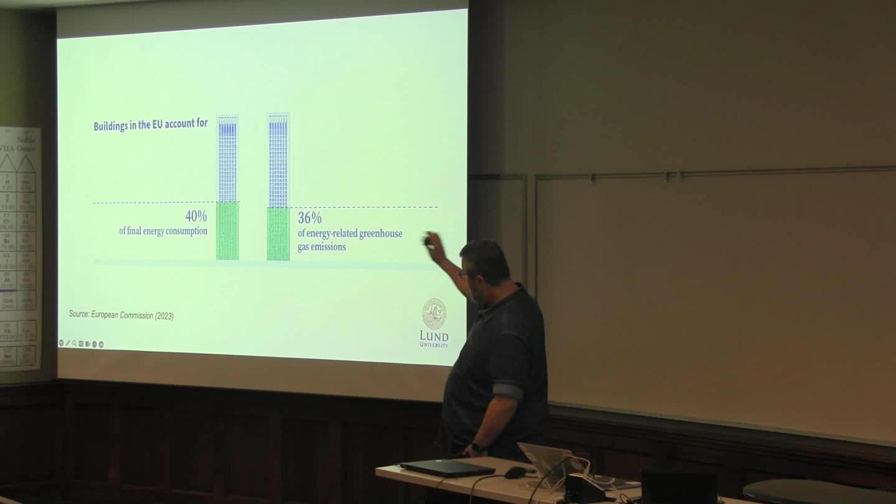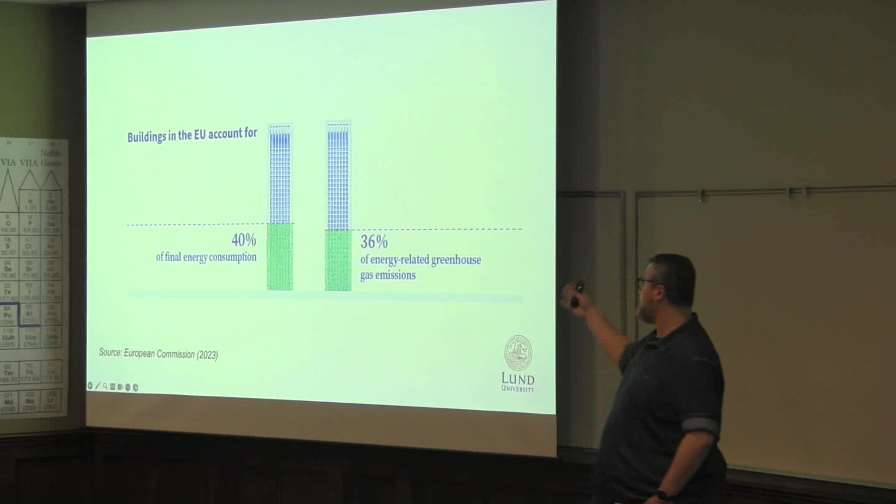That is a challenge with many parameters, can be different lectures. When we go to the buildings, the mix of buildings in the European Union is quite diverse. But let's start with the goals. They account for 40% of final energy consumption, especially for heating. Still, many European buildings use electricity as a heating measure, and they are responsible for 36% of energy-related greenhouse gas emissions.

There is a huge potential for cuts, and that's exactly what we are trying to do. Almost 75% of the existing buildings are inefficient, and they will require energy renovation on a large scale. Just think of different countries or cities you have in mind - quite a huge building stock that is before the Second World War. If less energy is used and more green energy is included in the mix, then we hope for fewer emissions.

It came with different kinds of policy and different kinds of strategies for both residential and non-residential buildings. The member states had to set minimum energy performance standards. By 2030 at first, lower than 16% of the worst performing buildings. You will see later on that when we talk about the old building stock, this is a very puzzling case to achieve, at least in the majority of countries.

And by 2033, lower than 26% of the worst performing buildings. In some countries, it has been included in the legislation to compare against the worst performing buildings as the building stock is, but in other countries, this comparison is against a newly built standard, and that creates a challenge, because a building from the 20s, it's pretty hard to achieve that level of a newly built.

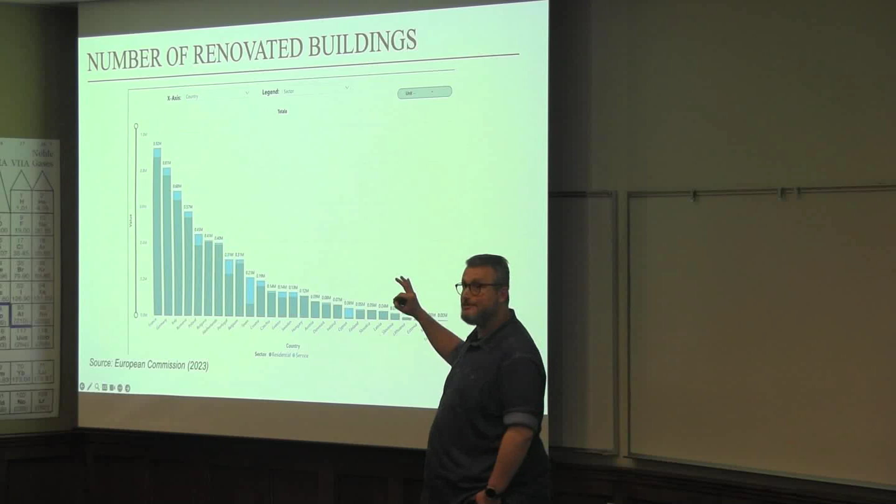This is the fun fact. When we see the number of renovated buildings in Europe, we see quite a high number in some countries. This is a very tricky number though, because when we talk about renovation in general, even if you paint the outer walls of your house, it is considered a renovation. Even if you change glass on your windows, it is considered a renovation.

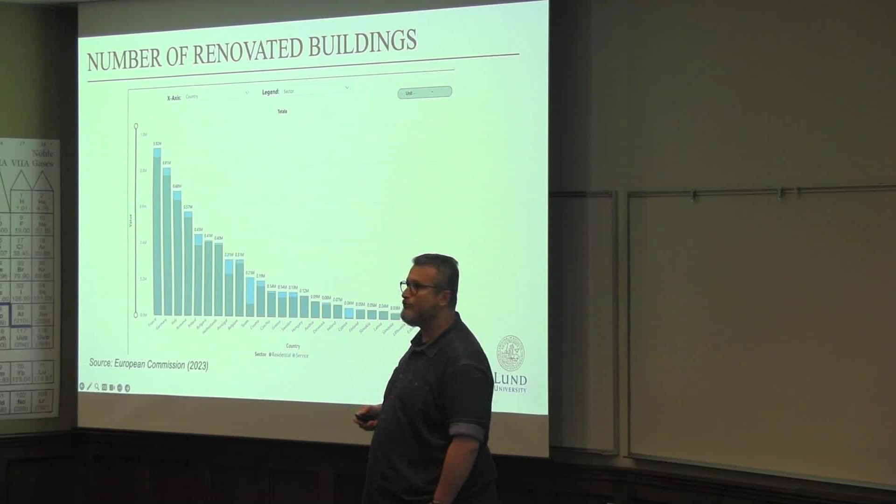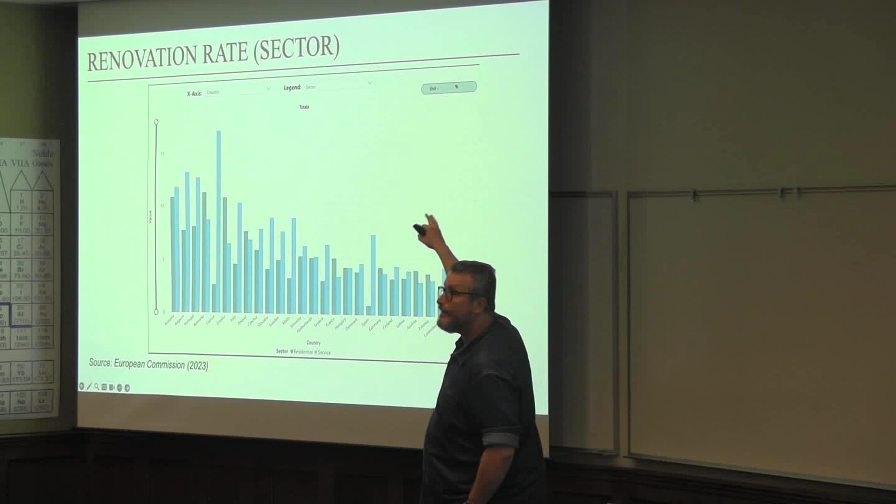When we are going to go to the energy renovation of them, the renovation rate per sector, you will see that it's quite high in terms of percentage. But when we are going to the energy renovation that actually is going to produce the results we want, we go in most of the countries below 0.6%.

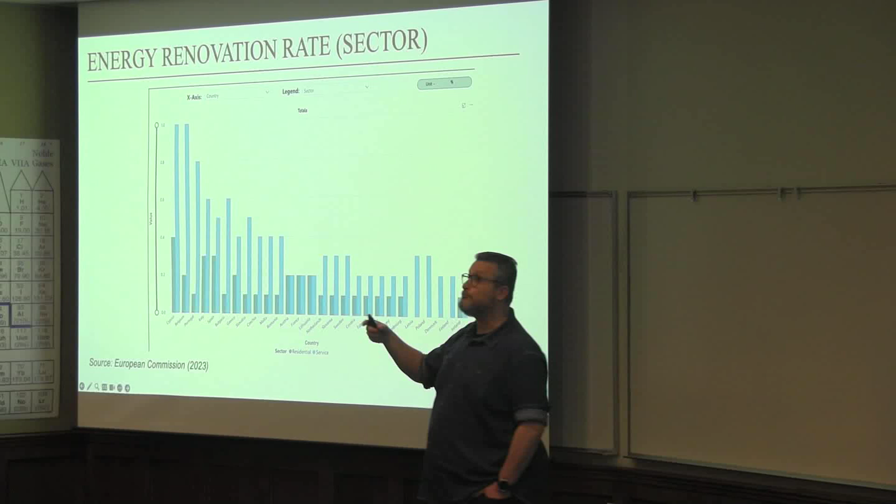The optimal goal, in order to be as close as we can to the goals that I described before, is to have a minimum of 3% of the buildings renovated in every country every year. So from 0.6 to 3%, it's quite a distance.

But the European Union, since they saw a big opportunity, a big market opportunity for that, they came quite strong with the one-stop shop business model. It is a model that is not innovative at all. It is quite an old business model existing in the market, but we have tried to apply it in the building sector.

We want a combination of materials and products in different trades, somehow to bring all the different people involved in renovation in one place, focus on this renovation, and deal with the complex characteristics that the renovation of a building has.

It's still, per country, very difficult to evaluate how these combinations of solutions will work, but at least we have a clear view of what kind of solutions need to be applied per building. We save the customer from the huge investment of finding all those different professionals and from the huge transaction cost of trying to bring all those professionals together.

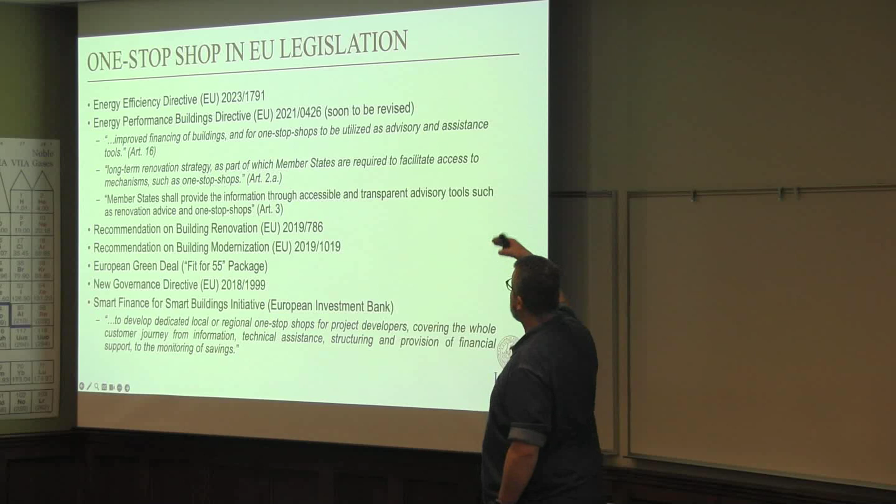The European Union has propagated this in any possible way one can imagine. It is still in the new Energy Efficiency Directive, which clearly says about one-stop shop. We have the Energy Performance of Buildings Directive that says that in order to achieve the goals, especially in the building sector, we need to improve financing of buildings and develop one-stop shop and utilize one-stop shop as advisory and assistance tools.

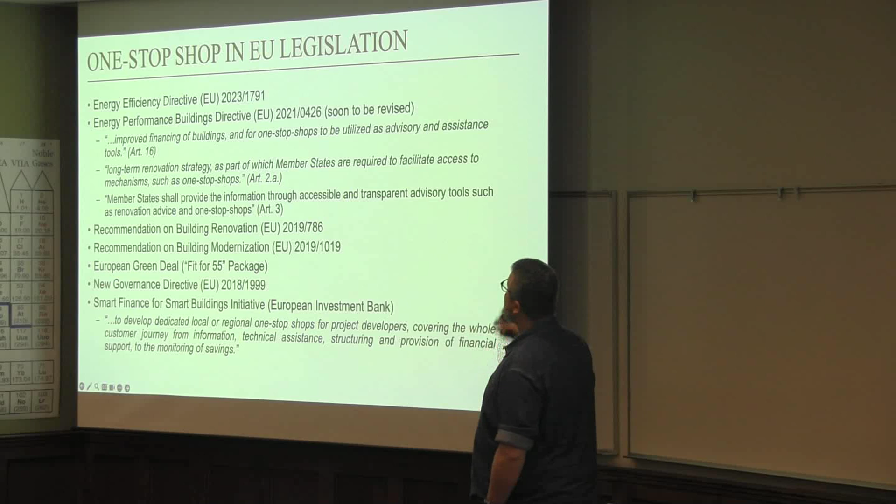Countries have to develop long-term renovation strategies, part of which is to facilitate access to mechanisms such as one-stop shops. They shall provide to their people and their communities information through accessible and transparent advisory tools such as renovation advice and one-stop shop. The renovation advice has been applied in municipalities.

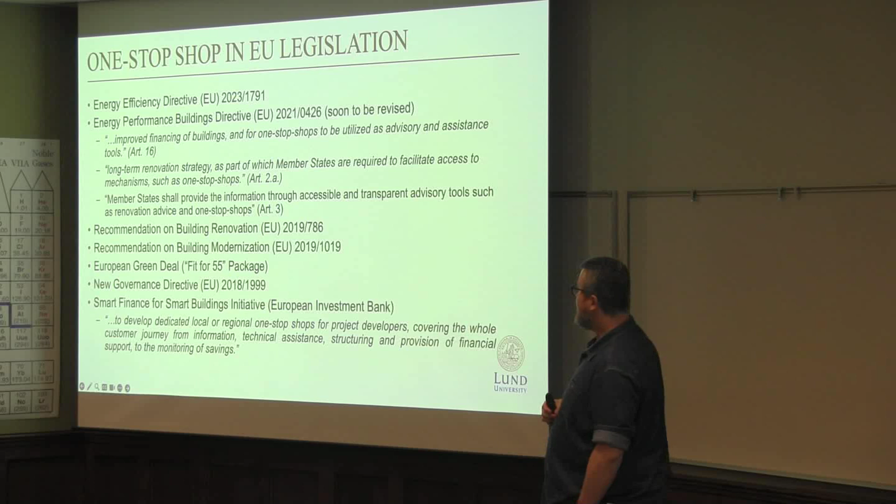One-stop shops are again in the market. The term one-stop shop exists in the recommendation on building renovation. It exists in the recommendation on building modernization. It has a whole paragraph dedicated to itself in the Fit for 55 package that is about circularity and efficiency of materials in the European Union. It is clearly stated in the new governance directive, and of course, it is included in the Smart Finance for Smart Buildings initiative that comes from the European Investment Bank.

But what is one-stop shop in actual renovation? Practically, it is based on the logic that the homeowner will have one contract for the whole renovation and one contact point. They do not have to deal with different professionals themselves, but they have a dedicated person working for them on that.

And we try to create a model that provides all renovation-related services in one place. The majority you will see, because there are different types, those that go throughout the whole renovation, they offer pre-renovation audit, tailor-made proposals of measures for each building, long-term renovation planning, and in some cases, even a financing plan.

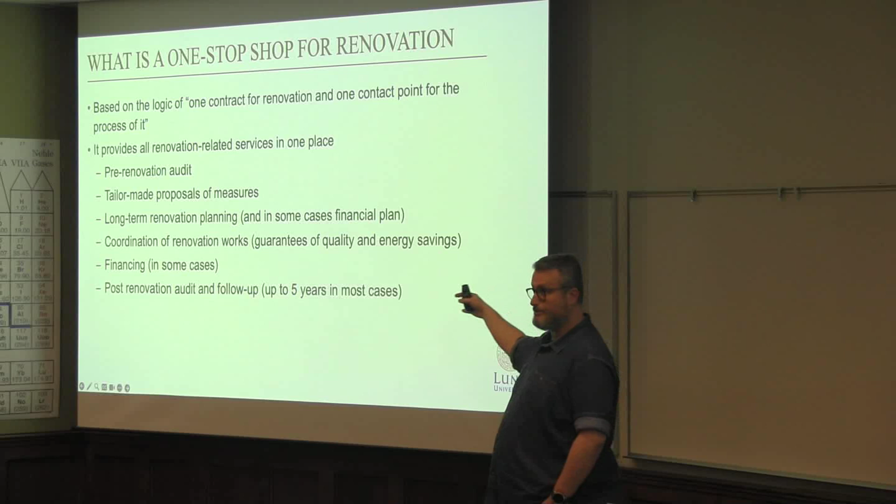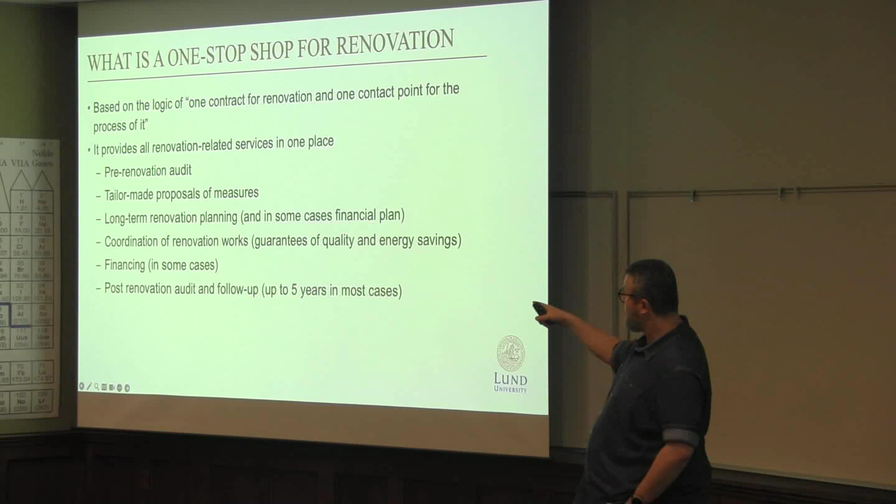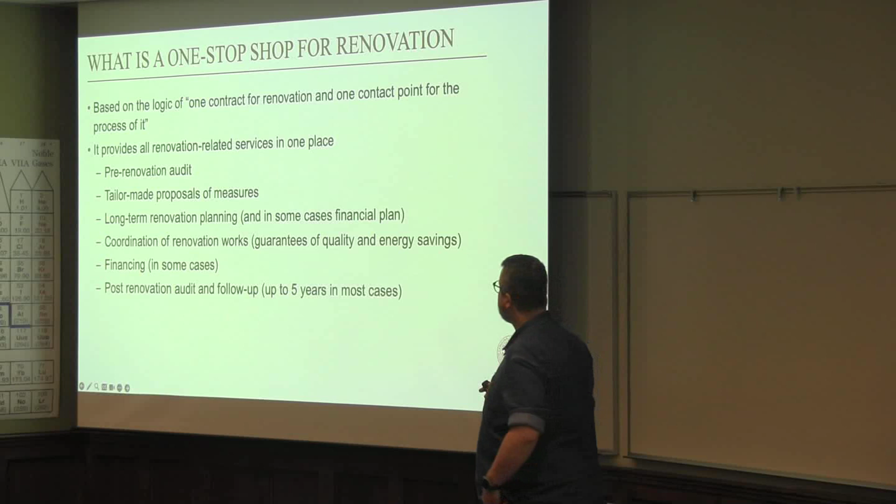Coordination of renovation work and guarantees of quality and energy savings. We have even developed a contractual agreement that guarantees this. As I said, financing in some cases comes in different ways. We have tried many different financing models. And of course, post-renovation audit and follow-up up to 5 years in most of the cases. So we can guarantee that at least in 1/5 of the life cycle of most materials, we have performed a good work. It is a polymorphic model.

It comes in many different variations. Either sometimes the one-stop shop will do the marketing to the homeowner or the professionals, or the one-stop shop will come and streamline the whole process, or it will be a digital entity that streamlines the renovation process, or it will deal with all the difficult work, including getting permission from the municipality, communicating with artisans, securing financing, performing even the renovation themselves, or it will be the central point for all the different actors involved, or even doing what it's quite known in the US, the PACE programs.

We have tried it. In some communities it was successful. In the vast majority of Europe, it's still questionable if it can work.

But all of these different constellations of the one-stop shop model are separated into three very distinct categories. We have the facilitation one-stop shops that practically get all the info for the homeowner and come with a set of solutions and proposals - it's not committing for the homeowner to follow those proposals. We have the coordination one-stop shops that practically run the whole process in the shadows without necessarily delivering the work themselves. And we have the all-inclusive one-stop shops that take the homeowner from the very beginning up to the end of the renovation.

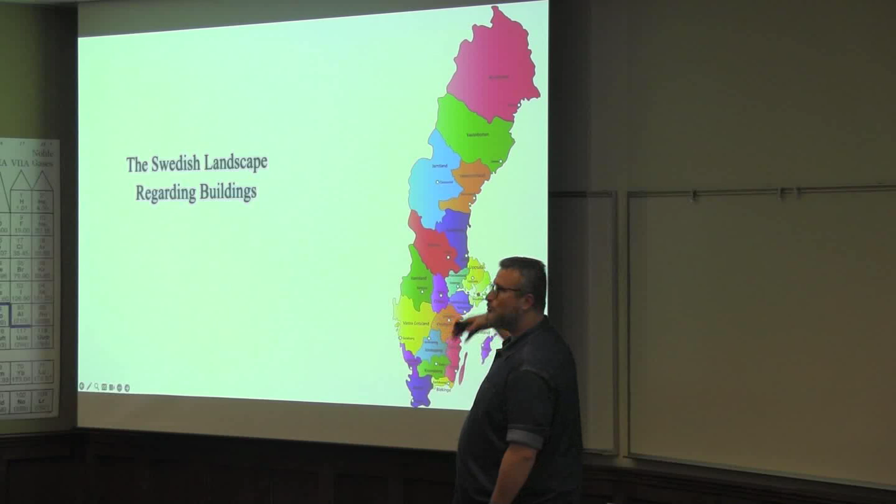If we go to Sweden, Sweden is a bit of a difficult country because we have 4 very different climate zones, so houses come with very different needs. But again, we have a vast majority of residential building stock, nothing crazy there. We have a very good balance between single family and multi-family houses - about 45% single family houses and 55% multi-family houses. What is fun is that the single family houses are occupied by a larger population than the multi-family houses. We have many multi-family residential units that are occupied by just one person.

In terms of occupancy, again, primary residence is the king. Secondary residence isn't that extended, because the landscape helps - some primary residences can work as secondary residences as well. And we have quite a significant number of vacant houses that, again, we have tried programs of local development on how we're going to make better use of them.

The proposal that came lately from us is to renovate some of those abandoned houses - mostly they are old houses - to a living standard, then sell them at a lower price to low-income families or people that want to start a business in the areas where those exist, and then they are responsible for the further renovation of it.

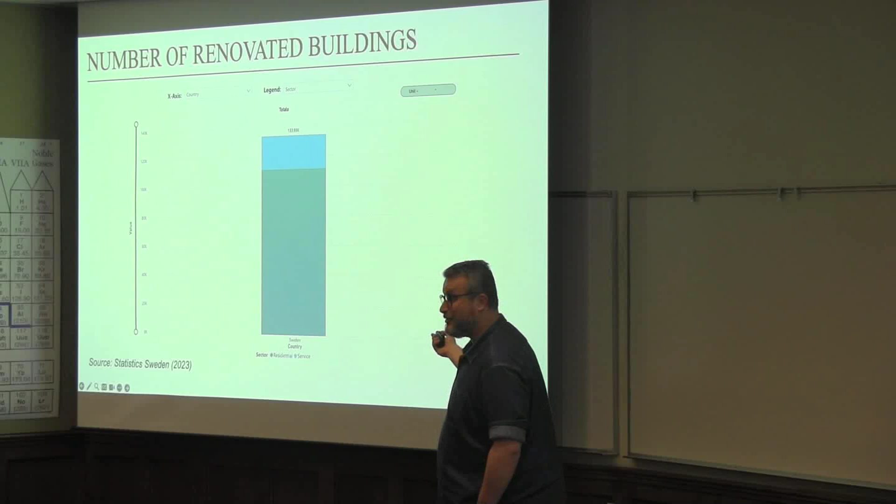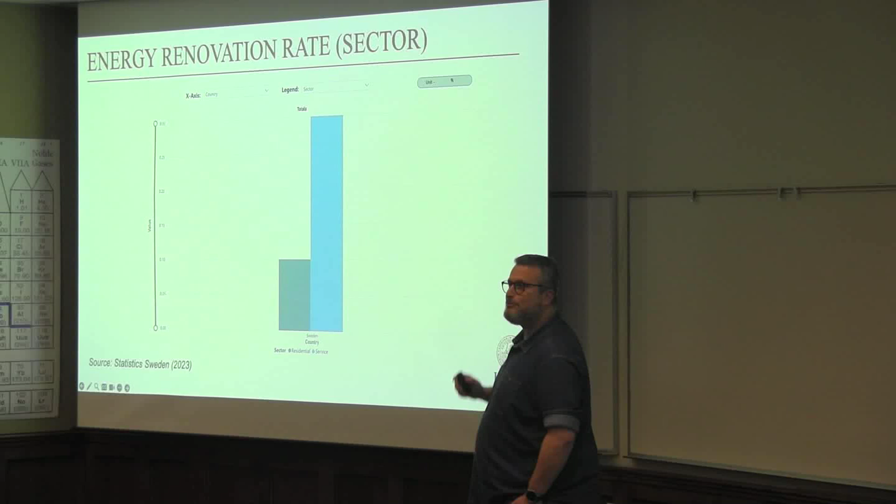When it comes to the number of renovated buildings, quite many are renovated. And when it comes to the rate of renovations, it's pretty nice - again, general renovation, as we said from the beginning. But when we go to energy, Sweden is at 0.3. And being a country with quite an old building stock, this 0.3 is a bit painful. But you will realize why it is painful later on.

The idea for renovations became more evident in the last year as the number of newly built decreases. The big companies in the country have operations to be occupied with, but the small and medium-sized companies that operate in the building sector, there is plenty of business still not used. We calculated that if we renovate 2% of Sweden's residential buildings to the minimum possible renovation, let's say 15% of the building, we talk about a market of around $1 billion per year. It's a huge market, maybe not for the big players, but the small and medium-sized companies, it's a big market.

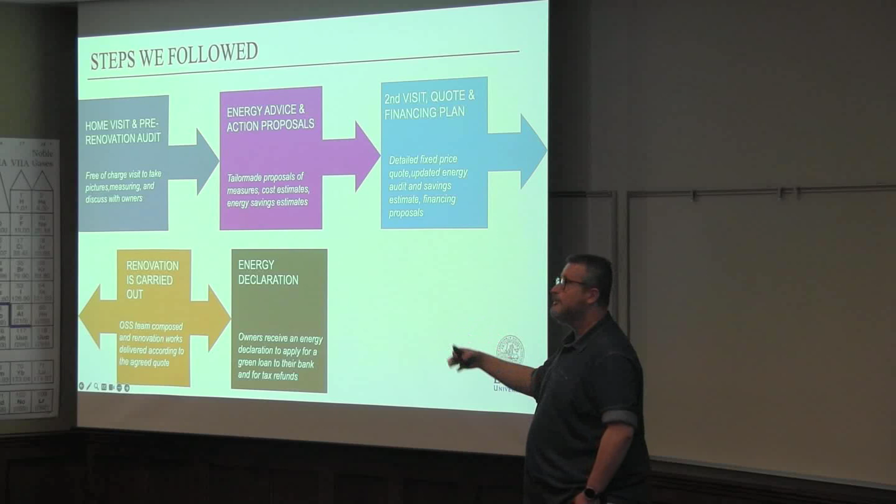We took some more detailed measurements, since they agreed, and we came with a pretty clear quote and financing plan. Hopefully, they have agreed to do the work, so we have carried out the whole renovation, and we gave them the energy declaration in the end to apply for a green loan with the bank.

Part of the renovation, we have secured financing for them, but the other part was through a green loan from the bank.

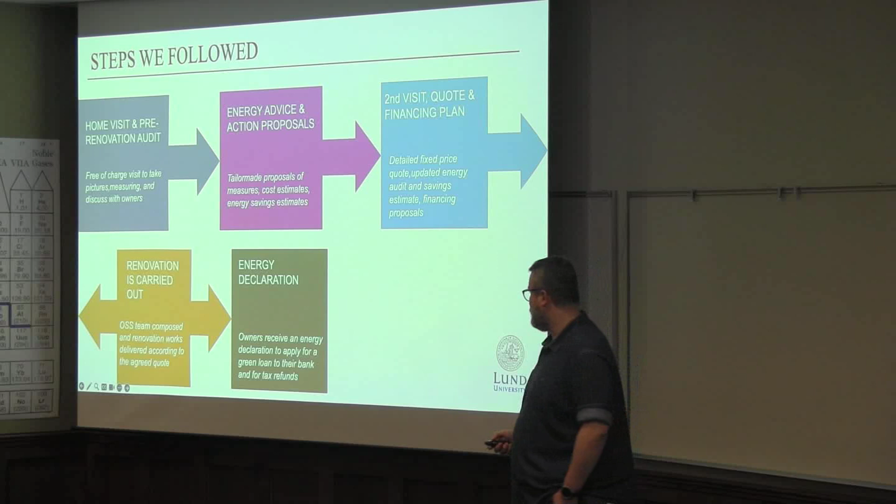Practically, since we are not allowed to share actual photos of the buildings, it is considered information that we cannot share. A bit schematic of what we have done.

We have changed doors and windows, but with windows we had the limitation due to the fact that it was a historical building, so we could not change the glaze of the windows. We just took out the windows, insulated the frame, and put the windows back. The same with the doors.

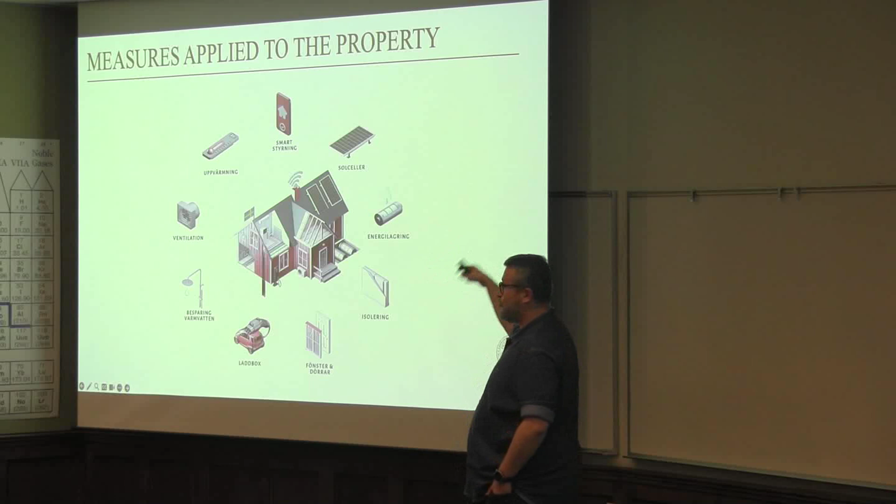We have put some extra insulation. We have applied solar panels. We have helped them with smart solutions for their house.

Ventilation system, which was important and was the trickiest job that we could do. Also, we have created a system to save the warm water and use it for other purposes in the house.

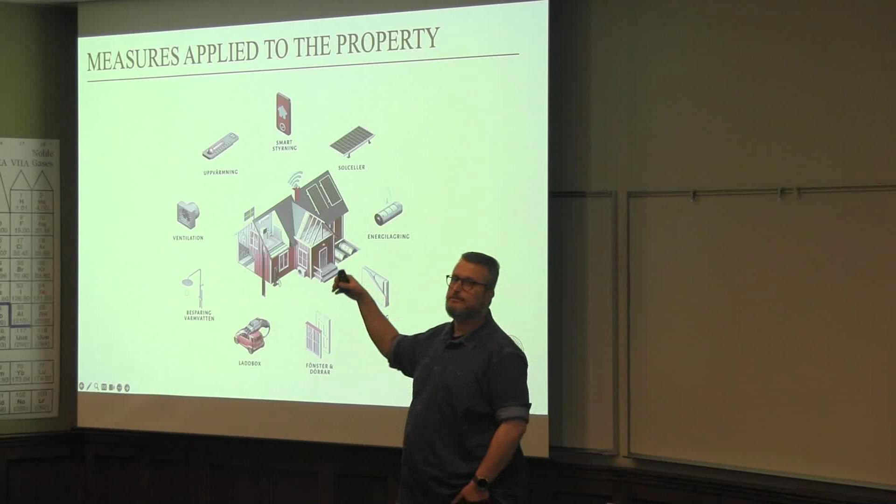And we have changed the heating system from oil and pellet into a ground source heat pump. We could do it; we didn't need to dig that deep for that.

The one-stop shop team was consisted of one energy advisor, 2 electricians, 1 installer for the solar panel system, 1 expert in ventilation and heating systems, 1 plumber, 1 tile setter, 2 painters, 2 carpenters, and an architectural historian that came from the municipality to make sure that we followed the whole process. It wasn't planned at the beginning, but since the building was characterized as historical, we had to include that person as well.

What have we achieved? From 235%, we got to 110% of the requirement for new buildings. So practically from energy class G to energy class D. For a building of this age, it was a huge change. We couldn't believe it even ourselves.

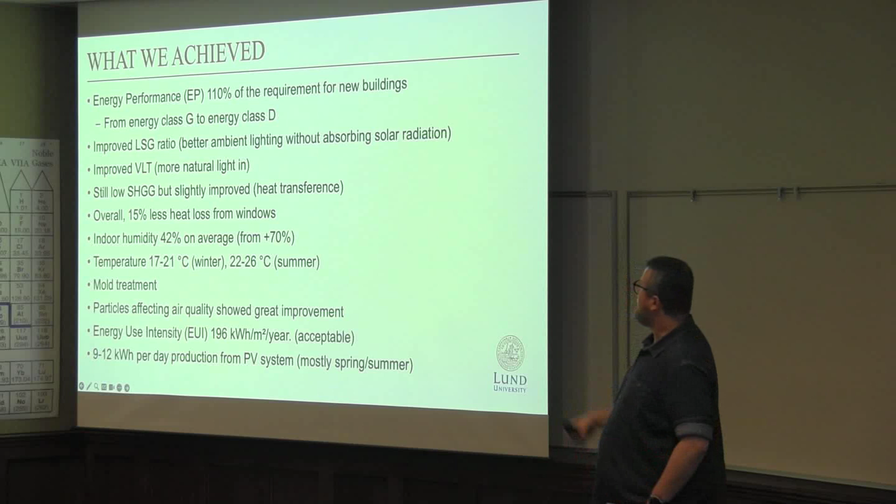We have improved the LSG ratio. We have better ambient lighting without absorbing solar radiation. We have played a bit with the windows, to be honest, and with the actual lighting that we had inside the house. We have allowed more natural light to get in, and that helped us a lot with the heat transference. Still low, but we have to think that we couldn't make change on windows. We couldn't put energy efficient windows, so we had to deal with what we had. But with the insulation we had overall

15% less heat loss from them. The indoor humidity was on a level of 42%, which is pretty cool compared to 70%, plus 70% that it was before. We have managed to have a pretty balanced temperature between 17 and 21 degrees in winter, which is accepted in Swedish building codes, and 22 to 26 degrees in summer.

We have treated the mold. We had to be very careful because we had to keep the floor as it was. So we had to support it at the same time, treat the mold in it.

Particles affecting air quality showed great improvement with the change of the ventilation system. The energy use intensity was acceptable compared to the previous, and it's within the limits of a building of its age and category. We also had quite good production from the PV system, mostly during spring and summer, 9 to 12 kilowatt hours, more than the needs of the actual building. They could sell about 2 kilowatts even to the grid, which was pretty good.

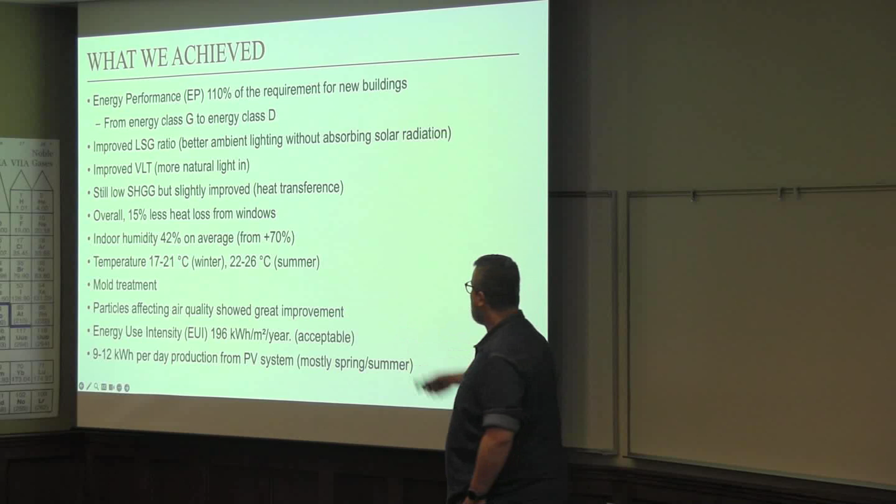The reality of numbers: they bought that property for $48,000. Overall, the cost of renovation was $160,000. The valuation they got right after the renovation is $120,000 from 48. So, by my standards, it was a success with the house we had to deal with. Some others considered it a failure because we haven't managed to get a valuation price that could repay directly back. But this difference in overall price, within 10-15 years, will be fully paid back. Maybe create some profit.

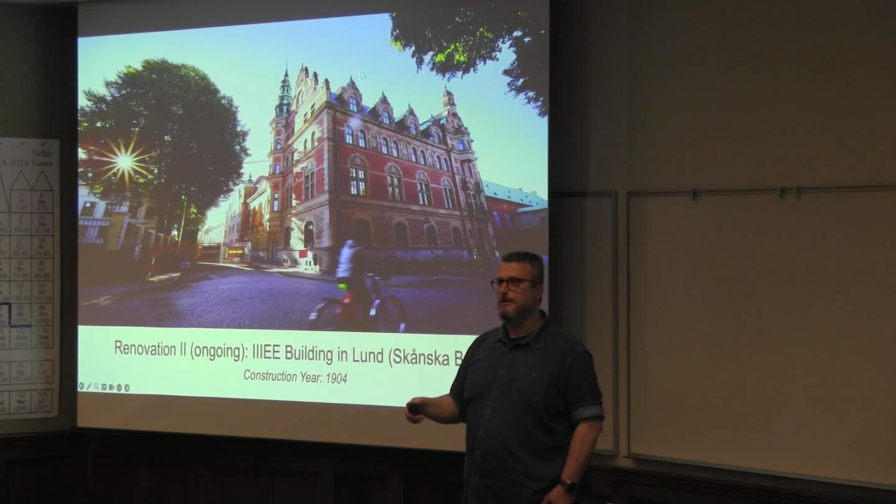Then we're going to the second ongoing renovation, which is actually the building I'm working at. Many fun facts with that building. It is built in 1904, but it is placed in the center of the medieval quarter of the city. In this medieval quarter, we have buildings that are built from 840 up to the late 18th century. And you will see how it affects later on.

First, since we saw that we have too many problems to deal with, we went with historical research and documentation. What was before that building? What happened when that building was built? Are there any archives to see what elements have they kept? What has changed? Then we did a site assessment, obviously. We are there all day, so we did it.

Then we have to go back to see what kind of regulation we have to deal with and what kind of approvals we can get. Because this building is not only historical, it is also a heritage building because of the fact that it is in the medieval quarter of the city.

Then we had to find information about the architectural design and planning since way back in time. We had to engage too many stakeholders, and they keep on coming. And then we had too many problems with material and craftsmanship assessment. Why? You will see why.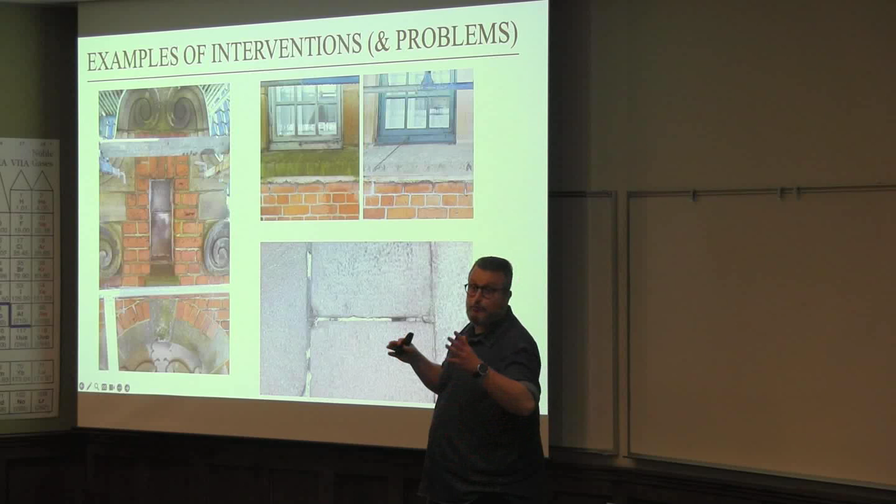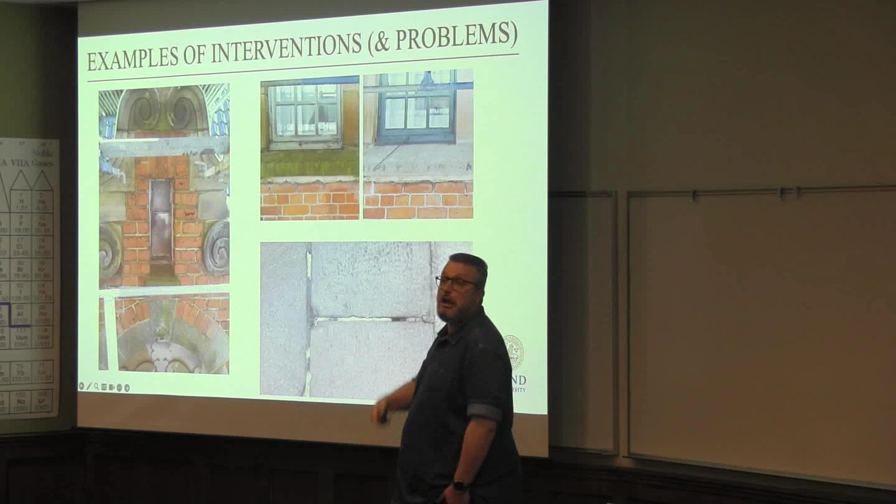Some of the problems - obviously we had lots of mold around. For treating that mold, believe it or not, we had even 2 conservationists and 1 historian working on that, because we have to be very careful with what kind of chemicals we're going to use - they could destroy the original material. The end result, the coloring of the material has to be the same as it appears in the archives. We have to be very careful about that. The filling that we put between different elements has to be the exact same recipe as was used back in time. So you have to be very careful how to do it, and employ someone very specialized on that.

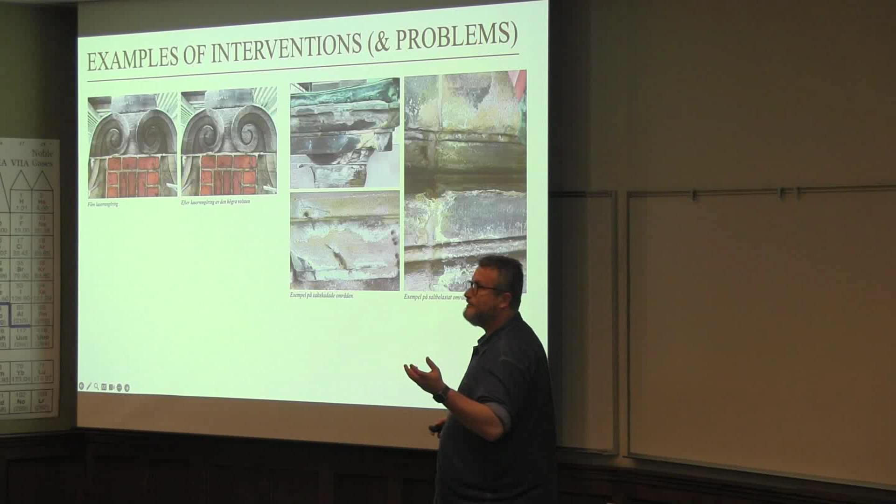You can see we had another problem. I don't know why - we are close to the coast, but not that close - we had a problem due to poor cleaning processes before, with minerals in the material, which in granite don't work very well. So we even had to clean those minerals and make it as close as possible to the original.

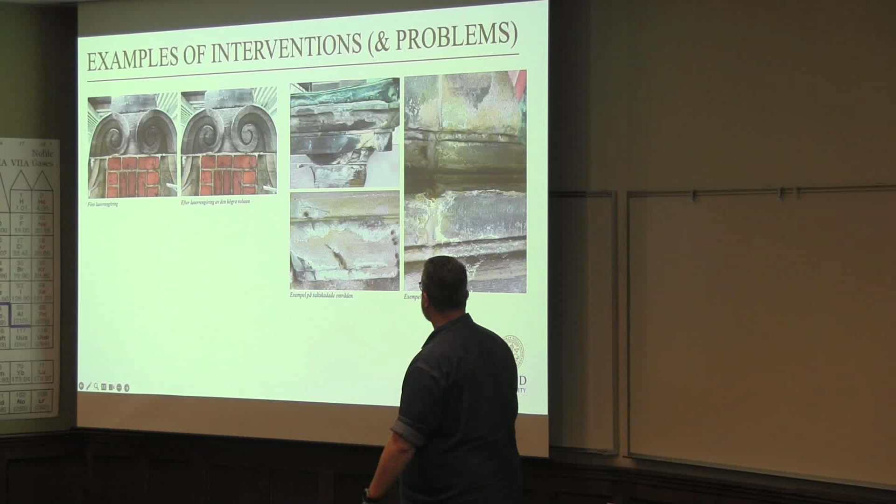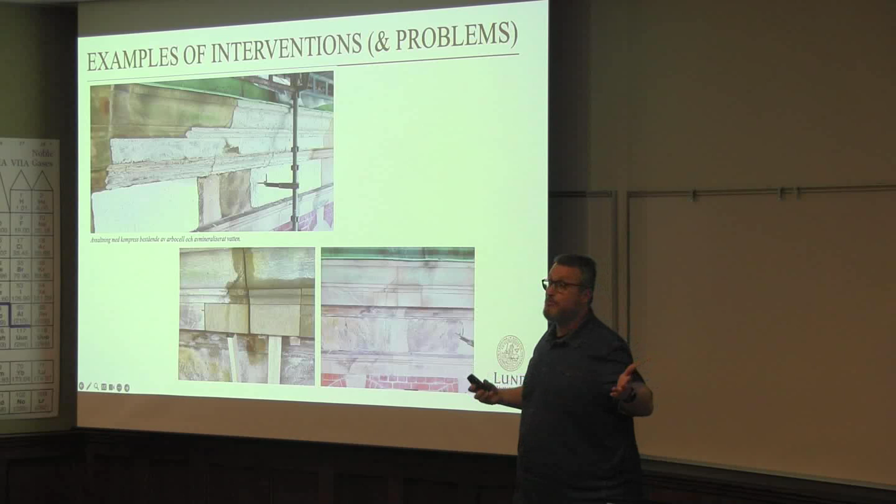In the balconies, again, mold treatment. You can see this is a test we did - the material as it was. We used the same recipe to produce the new material and compared it to see that we're in the same color coding there.

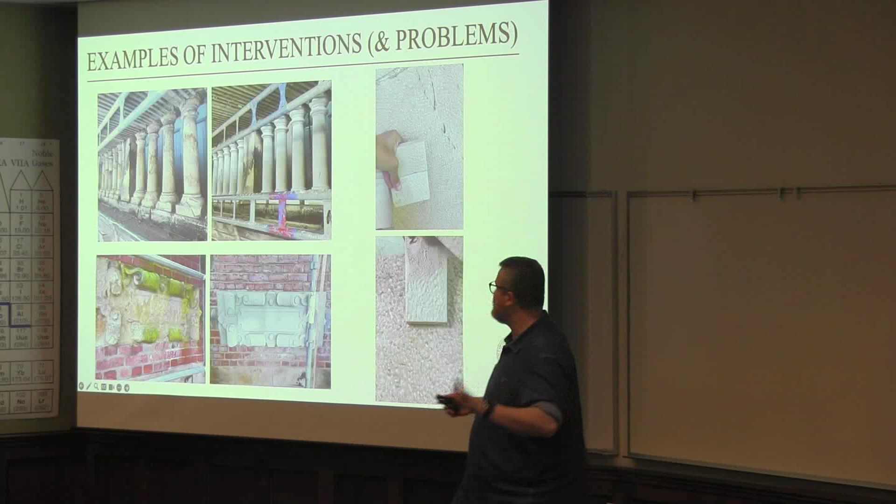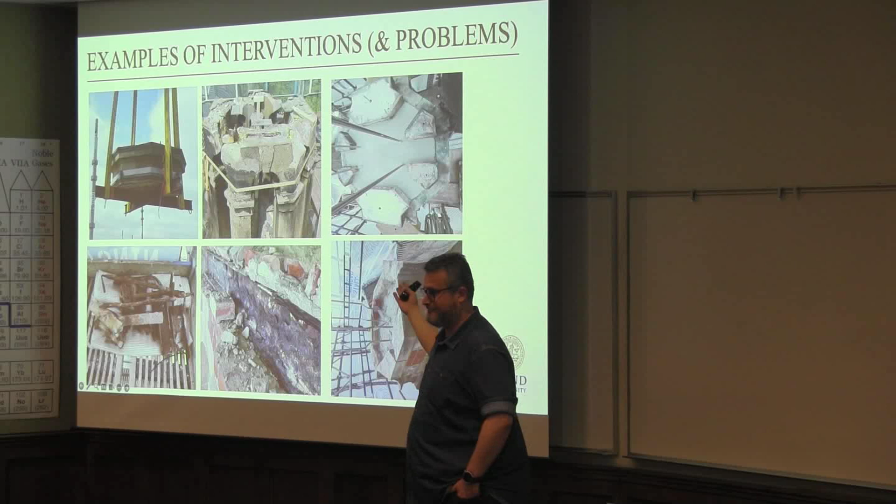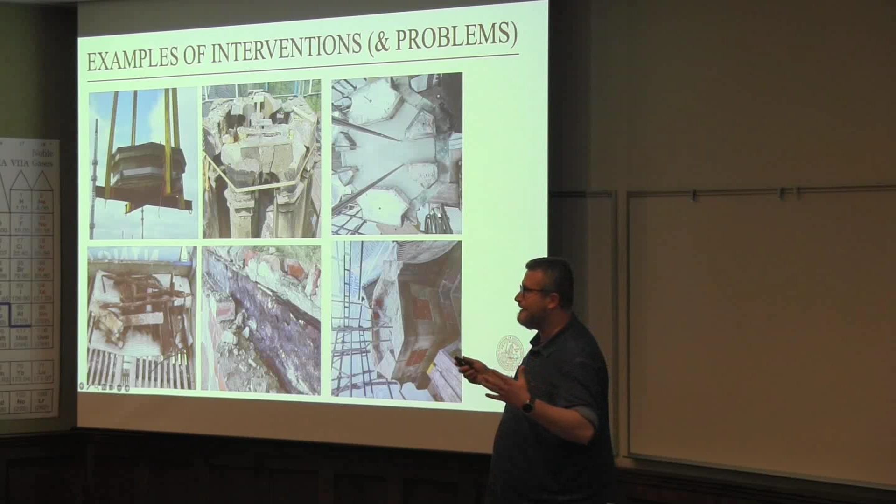And the biggest problem: the tower of the building. Too much rainwater, too much humidity, almost to the point of collapse. We had to fight more than 8 months to convince the municipality that we had to do this in order to stop it from collapsing over our heads. We came to a solution that would not be too visible outside, but would be functional for the building without disturbing its identity. We developed it, and it went well, at least so far.

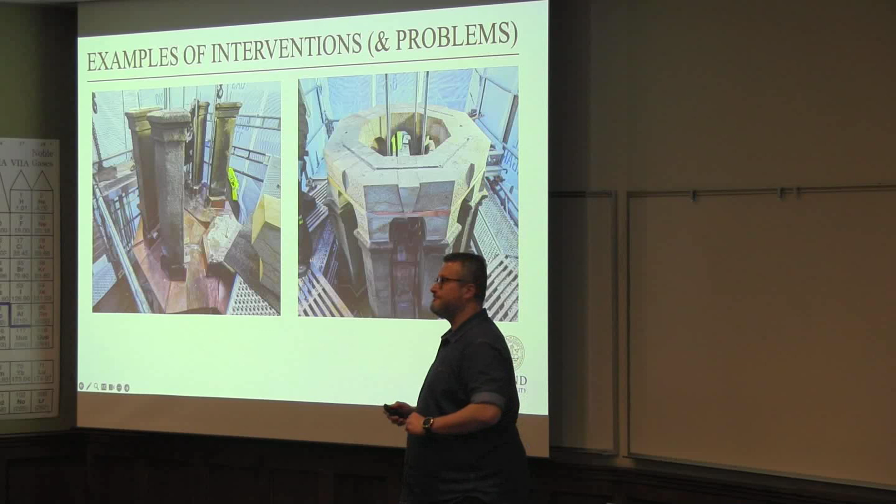We had to do everything from the beginning - take everything out, clean it, isolate it, insulate it, and put it back again. That was the end of it - this was actually 1 month ago. We put it back finally and we are glad about it.

After more than a year of renovation, the only parts of the building we have renovated are the front side and one-third of the back side. Imagine a huge building where we have the inner yard, the rest of the sides of the building, and the basement - remember, the basement dates to 930 Anno Domini. What are we going to do there? Nobody knows.

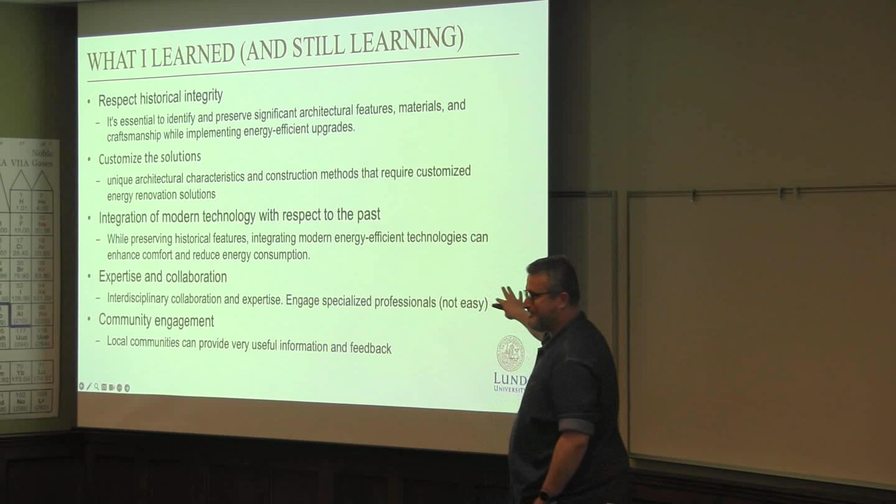What were the lessons we have learned from those renovations? At least for myself, I have developed huge respect for historical integrity. It is very important, especially for the last building, to preserve significant architectural features.

The inside of our building is even more beautiful, and there will also be a challenge for us in how to renovate it. We had to become practical on site. Whatever we had planned before, when we came on site, it was another discussion.

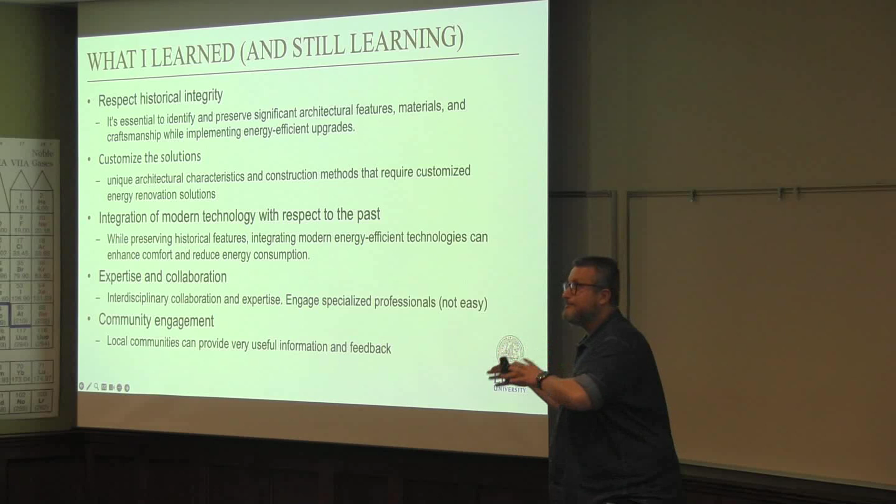We had to come with practical solutions in order to conserve this unique architectural characteristic and the methods that had been used. We tried as much as possible to integrate modern technology with respect to the past. On the first building, it was easier for us because we didn't have so many elements of the historical building that we didn't need to touch. In the latter building, practically we couldn't touch anything without getting permission.

We have met in the process very, very specialized people doing extremely specialized work, and it is something that you really have to appreciate because they're not easy to find.

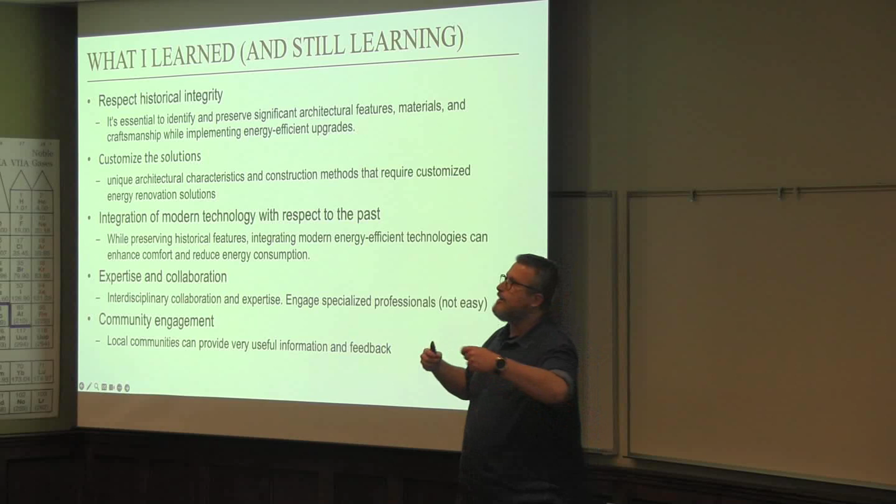Especially on the latter building, we were pretty glad because we had community engagement. We had people from all over Lund coming. I have a photo of this building from 1930, from my father. I have my father's photo in front of this building. I have a relative that was working at what that building was before. We have some archives. I used to be a safety engineer for that building in the 50s. I have some designs. Without their engagement, we couldn't find the material we found about the building.

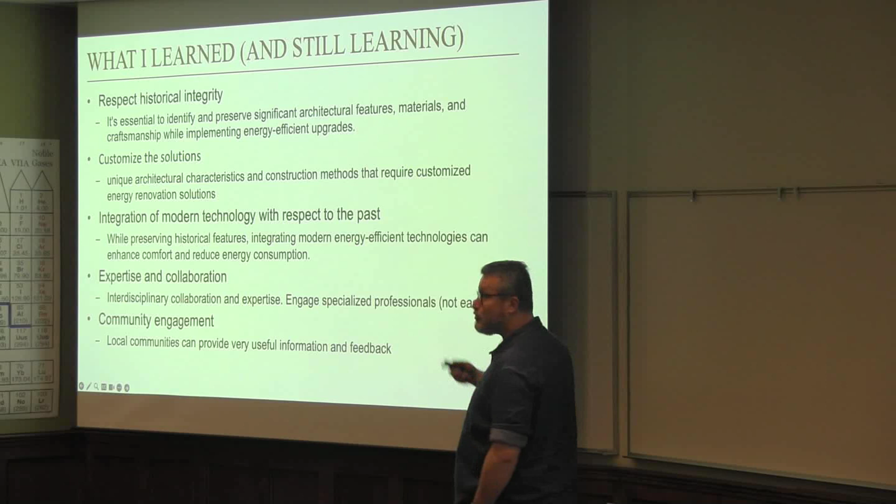So it is important to engage the society and also get their feedback, because they are people that have interacted with that building.

There are huge risks when you go to old buildings, and you have to become practical in mind and quick in order to mitigate them. You need to always see the big picture.

I renovate a historical house or a heritage building not only to serve the needs of nowadays, but with a view to the future. You have to be sensitive to the surrounding environment, because that is why they have been characterized as historical or heritage. They are deeply connected with their surrounding environment.

We renovate it now, but the work we did in the house and the work we did in our building is like a testament of what needs to be done in the future. So we need to make sure that there will be knowledge transfer between the projects.

And especially for the latter building, I have fully understood as an architect the importance of historic research. We did so much research that I feel that in a year I have acquired a new degree by itself, just by reading things.

Also, the importance of preservation principles—when they say that you have to keep the materials as they are, you need to be respectful, because they had a very specific use in the building, so you have to respect this.

Follow a very sensitive design approach. You don't design based on your own vision. You try to revive someone else's vision there, and try to do it in a way that will be convincing.

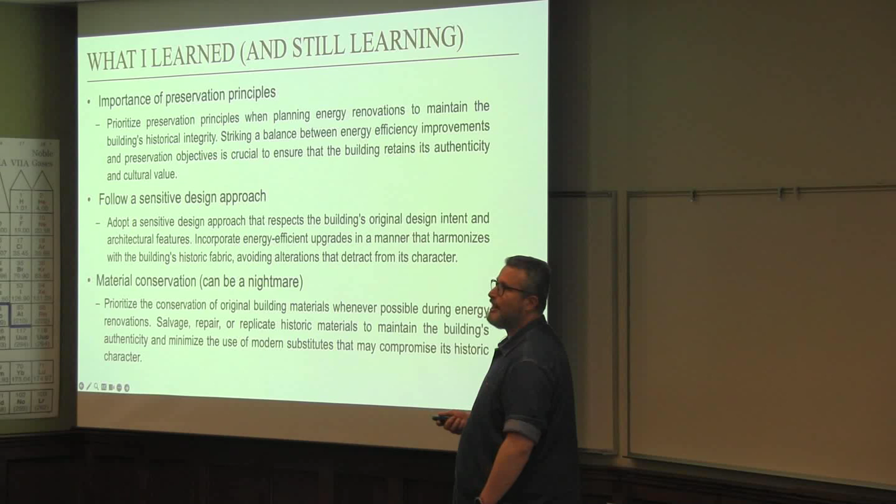And of course, material conservation, that can be a huge nightmare. Trying to work with stonemason techniques from the beginning of the century, or even with elements that are older, you try to understand what they did, why they did that, why they used that material, why they used that type of insulation. Being in that process to understand it takes time, but it's important.

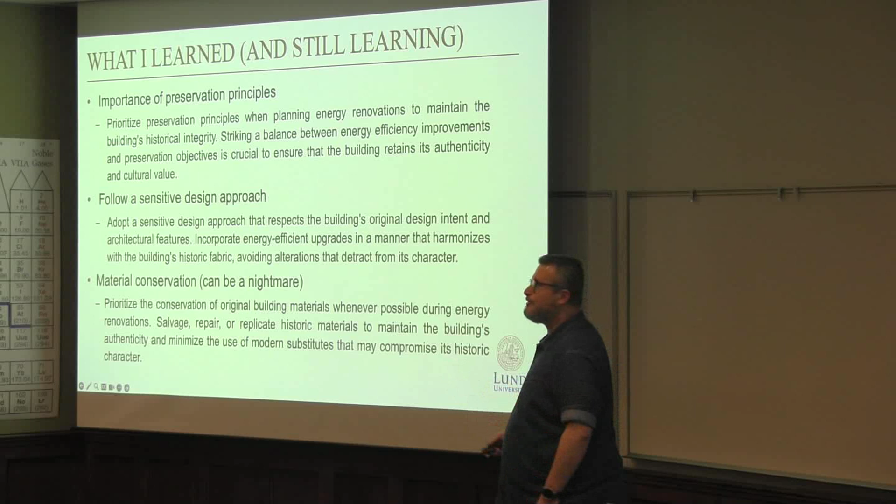Also, what we have realized is that you cannot go full on in those buildings. You have to be very selective. So you make many different scenarios, and you end up with something that will be optimal and will not push the cost to the extremes.

If we say that we are going to fully renovate the last building that I showed, probably it will cost us about $100 million. It's impossible to do it. So you need to be more effective on that.

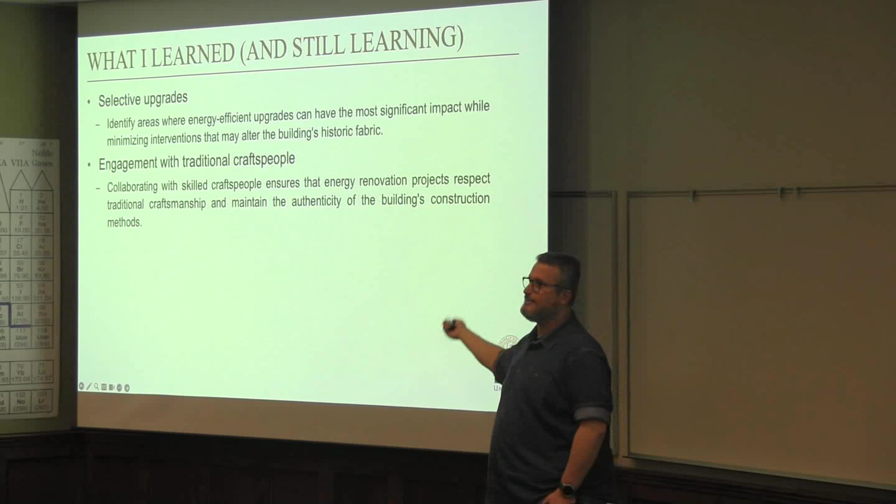And of course, engagement with traditional craftspeople. Quite many people in the construction industry don't respect those people, but they are extremely useful when it comes to those projects.

And of course, patience. It is a very long and painful process to follow, but it pays back in the end. And with that, thank you very much for your time.

Thank you for the presentation and some of the beautiful pictures of the buildings. Was there someone living in that home that had the mold in it, the one that you renovated? And as part of that, the $48,000 went to a value of $120,000, a cost of $160,000. Where did that funding come from? Is there an expected or necessary return on investment from that funding source? And what other factors beyond financial allow a project like this to move forward?

It is necessity. First of all, we'll start from the last part of your question. First, it is the necessity of it. That area, almost 95% of the houses are from the 1940s and before, so you have old houses. It is a necessity, I have to live in that house. It was new owners that bought it, the previous owners have sold it. They went into pension, wanted to go to a bigger city, so they left and just sold it. It was going to be occupied again.